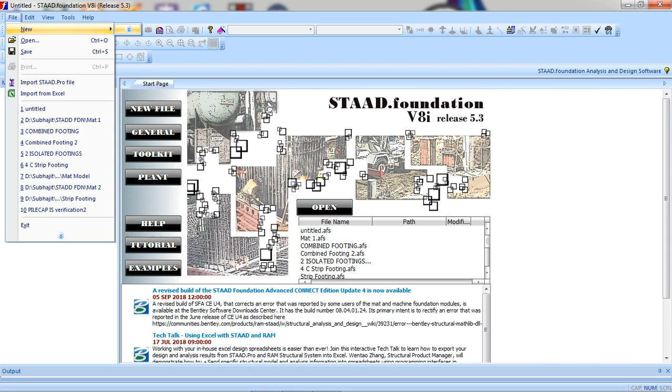Let's create a new file for general setup. At first, we have to set up our grid. We see that our grid has been set up 1 meter by 1 meter.

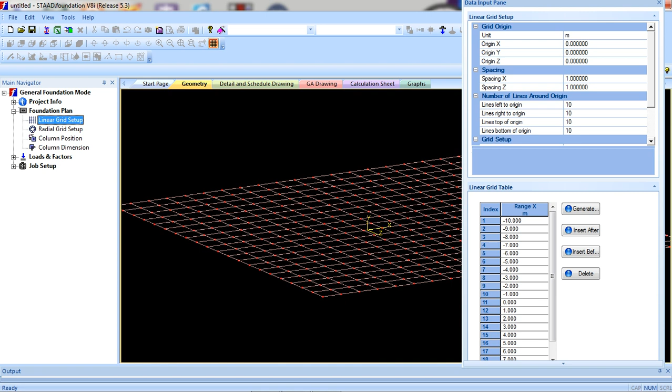Now let's fix the column position. We fix it at 0, 0, 0.

Now let's go to column dimension. We find column dimension has been given as 0.3048 by 0.3048. We change it to 0.35 meter by 0.35 meter.

Pedestal, consider pedestal? No.

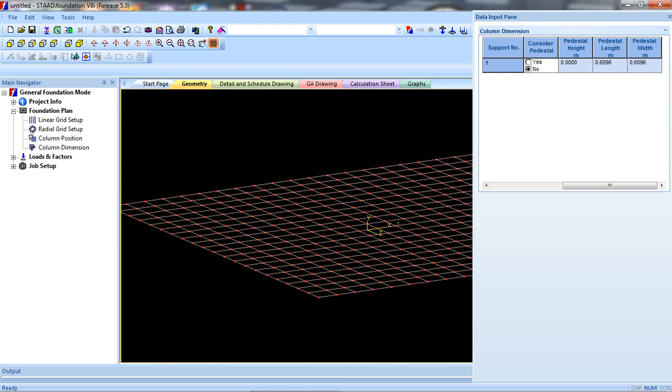Now let's go to load and factors. In load title we give dead load. Now on load case 1, right click and add column reaction load. We enter column reaction as minus 700 kilonewton.

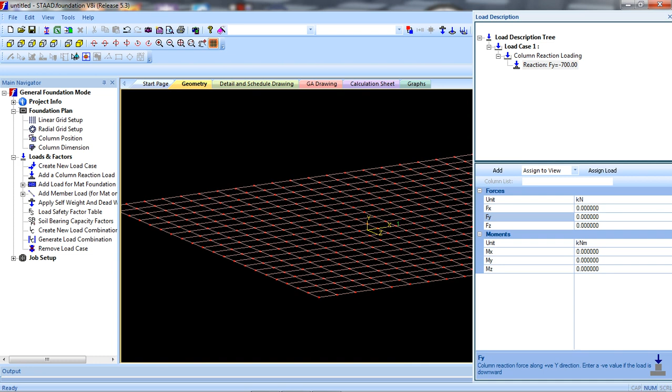So column reaction load of minus 700 kilonewton has been added. Now let's assign this reaction to the footing, assign load.

After assigning load, we will go to generate load combination. In the load combination table, we will check Indian code. Now update table and generate load combination. Load combination generation completed. This is for service load.

Another we have to create for ultimate load. Update table and generate load combination. Load combination has been created.

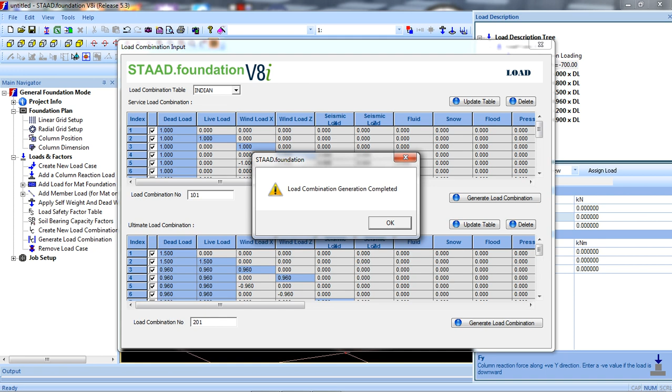Now we have to go to job setup, create a new job. Here we find we have to give a name. Let's give name as name 1. Job type isolated footing, code Indian, default unit SI.

Now we have to select the available load cases. One we have to select from service load and one we have to select from ultimate load. Now let's create job. So isolated footing job has been created.

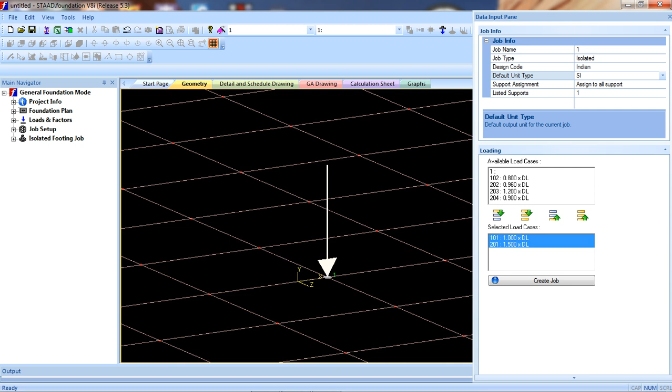Design parameter. Let's first go to concrete and rebar. Here we find unit weight of concrete, maximum bar spacing, minimum bar spacing, maximum bar spacing, strength of concrete, yield strength of steel. Let us change it to 500 Newton per millimeter square. Minimum bar size, let's change it to 12. Maximum bar size to 16.

Then let's go to cover and soil. Soil type, drain condition, bottom clear cover 50, unit weight of soil. Let's change it to 18 kN per meter cube. Soil bearing capacity 100 kN per meter square. Depth of soil above footing.

Let's keep it as it is, 0 millimeter. Depth of water table is 10 meter. Minimum percentage of contact area, let's give 100.

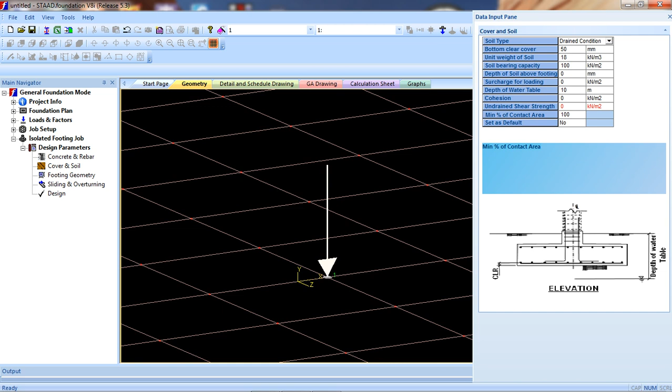Let's come to footing geometry. Footing is of uniform thickness. Design type will be calculate design. Minimum length 1 meter, length and width 1 meter. Minimum thickness 305 millimeter. And all other factors has been given, which you will read from here.

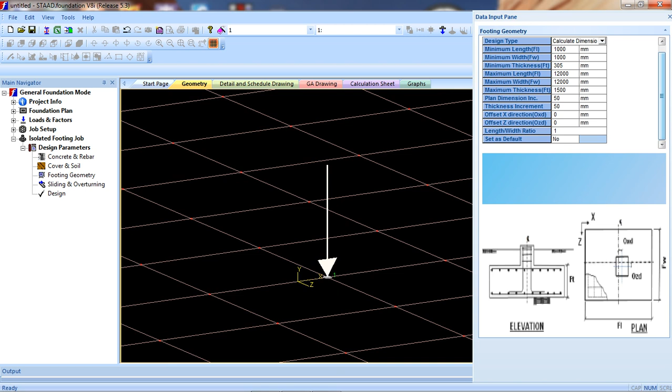We will keep it unchanged. Sliding and overturning, coefficient of friction 0.5, factor of safety against sliding 1.5, factor of safety against overturning 1.5.

Now let's go to design. So our design has been done. Footing design result: the length of footing is 2.8 meter, width of footing is 2.8 meter, thickness is 0.455 meter.

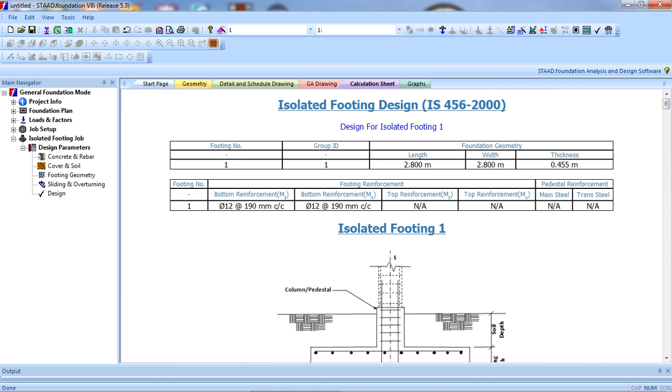Footing reinforcement is given as 12 diameter bar at the rate of 190 millimeter center to center in both directions. Design details has been given below.

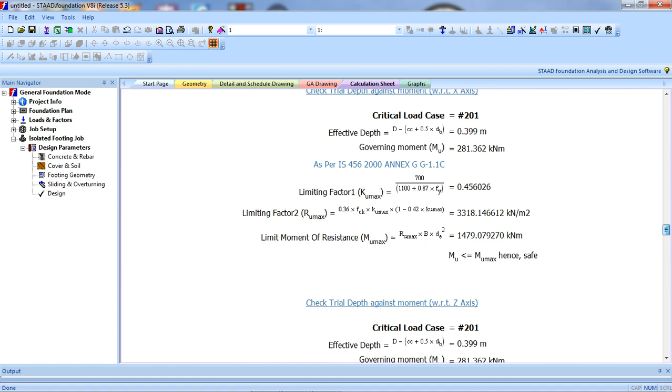Pressure at corner, checking depth against moment with respect to x-axis, z-axis, two-way shear, check for two-way shear.

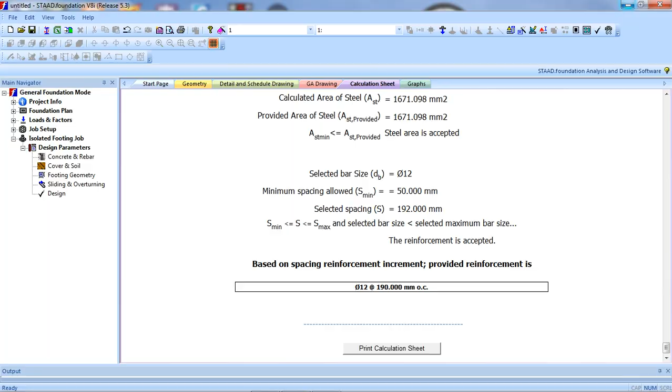So our assignment has been completed.